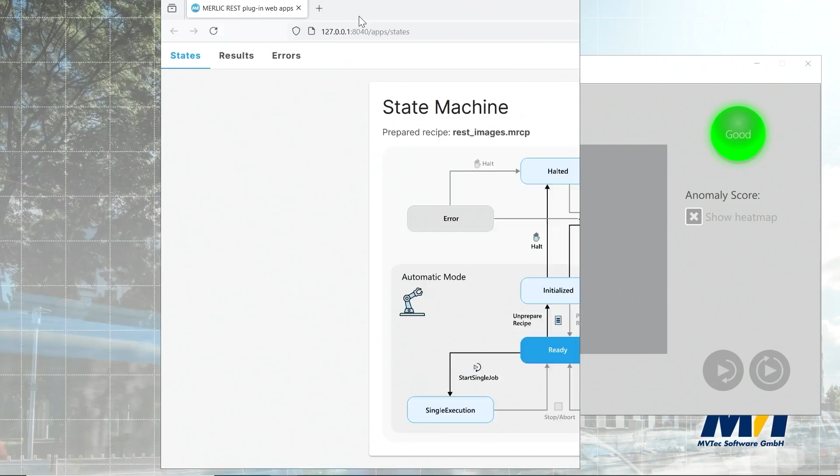So we see now the MERLIC frontend is started. Let's open a browser and give the address to the REST server. And now we see the state machine of our system.

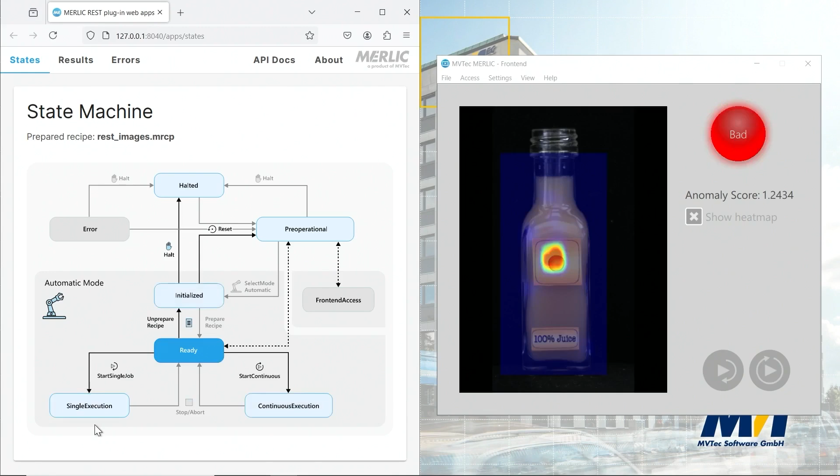Until now, there was nothing new in the presentation. Let's do a few single executions to see our application is working and go to the API docs. Now the API documentations are also not new in this MERLIC version. You can actually consult them in previous MERLIC versions as well.

But what is new is when we go to the results category, we see we can now get image results for PNG images or for JPEG images. These methods can be used in your application when you are building your own REST client to display images from your MERLIC application. Let's try getting an image result for PNG.

The very nice feature about the API documentation is that you can actually try each method out by clicking on Try it out under the method.

Now let's say that we want to get the result ID 1, so the first image result that we get from the first execution, and data index is 0. We only have one image defined as result in this recipe, so this has the index 0.

Let's click on execute, and we see, as a result, we get the image corresponding to the first execution of our application. Now, this is only one example of how you can use the REST methods in order to get images from your MERLIC application in your REST client.

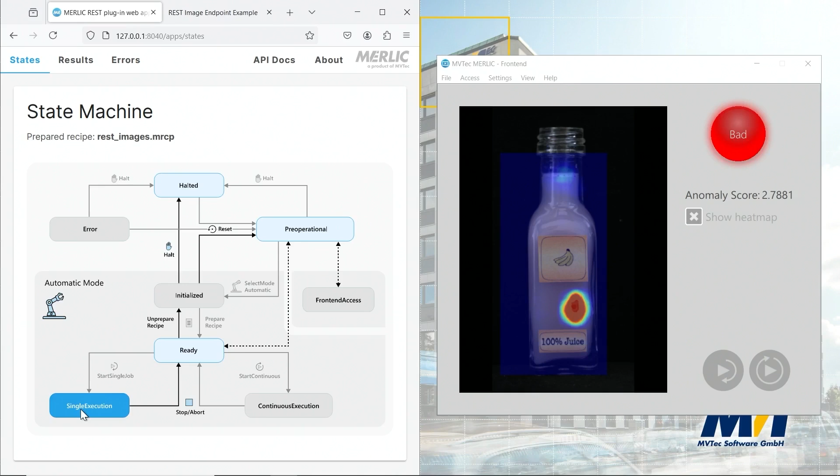Now let's do a few single executions to see how our application works, and switch back to the REST image endpoint example, and here you can see that the image results are automatically updated. And this is one example of how you can serve images using the REST plugin in MERLIC 5.6.

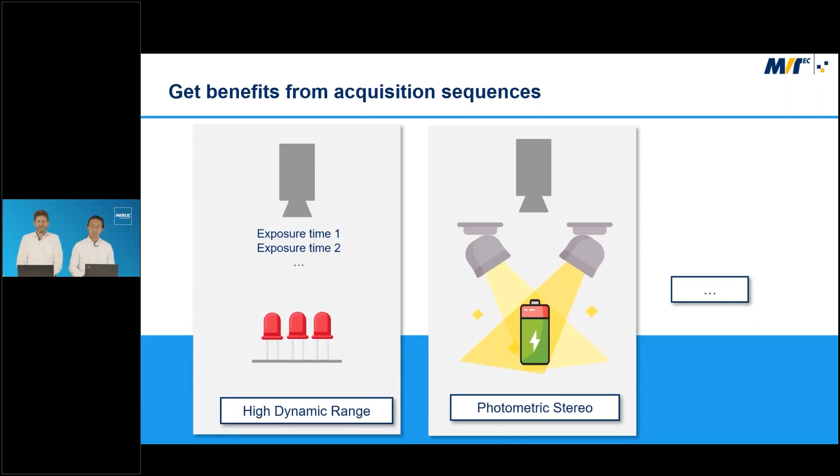Hello everyone, I'm Xin. I'm very happy to show you a new feature of MERLIC 5.6, image source parameterization. In this video we will show several parts. First, how to connect the camera with MERLIC and capture a live image, and maybe achieve a simple application. Second, how to set the image source parameters for your application.

Assume you have two applications with this setup. For the first application, you set a suitable exposure time to capture a good image. But for your second application with the same setup, the previous exposure time is too high, meaning your object might be overexposed. In this case you need a second, lower exposure time. So the question is how to set up everything simply. We will answer this in the second part.

In the third part, we prepared two applications with two image source parameters, and we will show you how to integrate everything in the MERLIC runtime mode. Now let's share my screen and see what happens. Here I have already started MERLIC, and let's connect the camera and MERLIC.

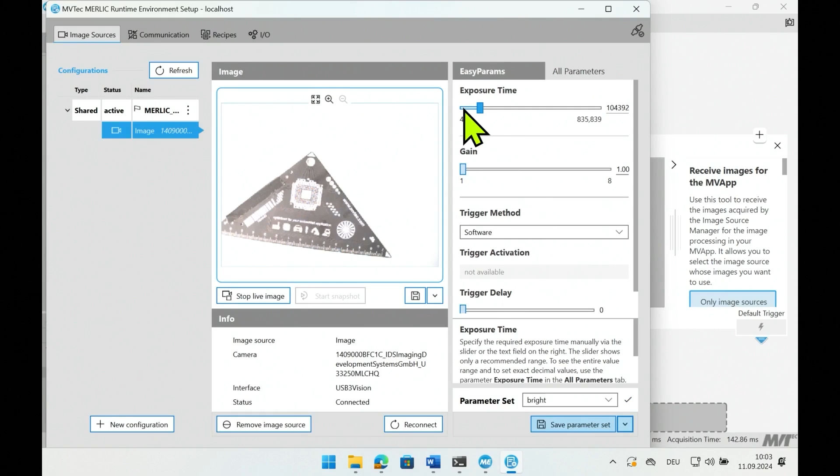And save as bright. And if we set it bright, this file will be saved separately. And we put an exposure time lower. We click here, save as dark. And this parameter set will also be saved separately. So we have now 3 parameter sets: bright, dark, read barcode image source parameters.

And now let's go to the selected sequences again, and we can see the active sequence is dark. So if we start it once, you see the exposure time is very low. And if we select bright, run it once, the exposure time is high, and we get an overexposed image.

In this part, we will show you 2 applications. The first one is to read the barcode from this triangle, and the second one is to read text and numbers of this sheet metal. Due to the reflection of this material, it requires low exposure time to capture a suitable image. And to show you the 2 applications, we prepared something for you. We create an MV app, read barcode, and MV app, read text and numbers. And for each MV app, we create the corresponding recipe files.

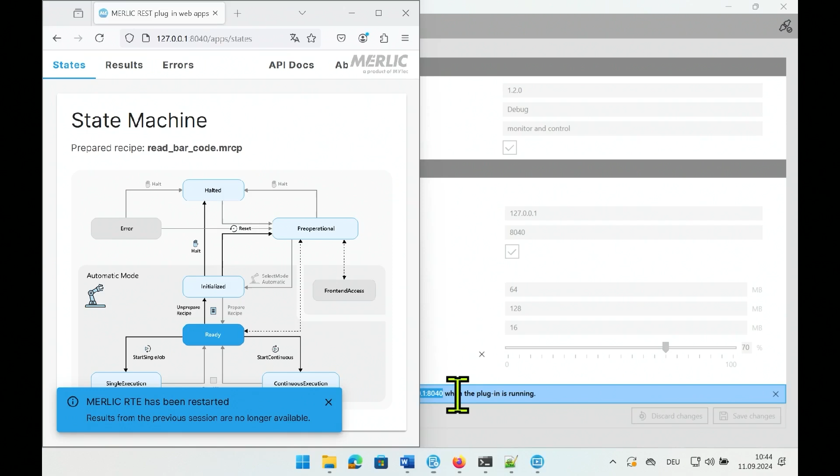To use this plugin, you only need to copy the IP address and port number into a web browser. So now you can see the state machine. And let's put the front end here. If we click ready, we can see the 2 recipes that we prepared. And the first recipe, read barcode. Start single execution. So now you can see the barcode is read. Here is the decoded information.

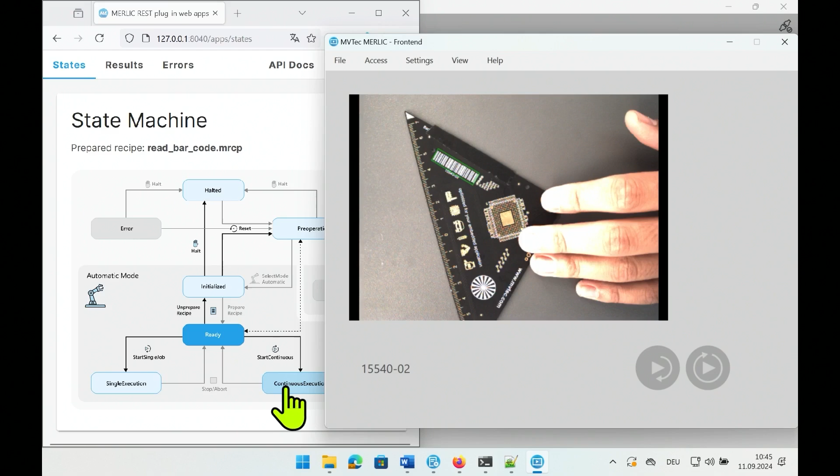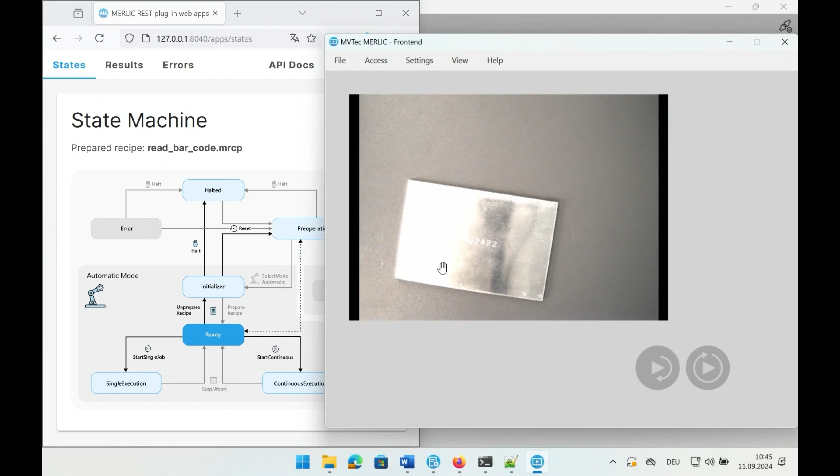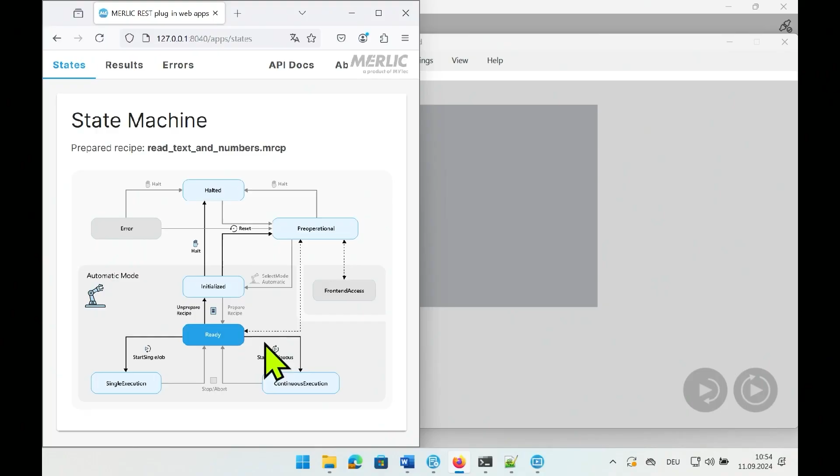And if I click continuous execution, you can see here is a live image. And if we put this sheet metal here, it's overexposed with the current exposure time. Therefore, we prepared another recipe with another exposure time. Now, the second application is loaded, and let's adjust the window size and start single execution. So now we can see the sheet metal and the text and numbers are read, and here are the results.

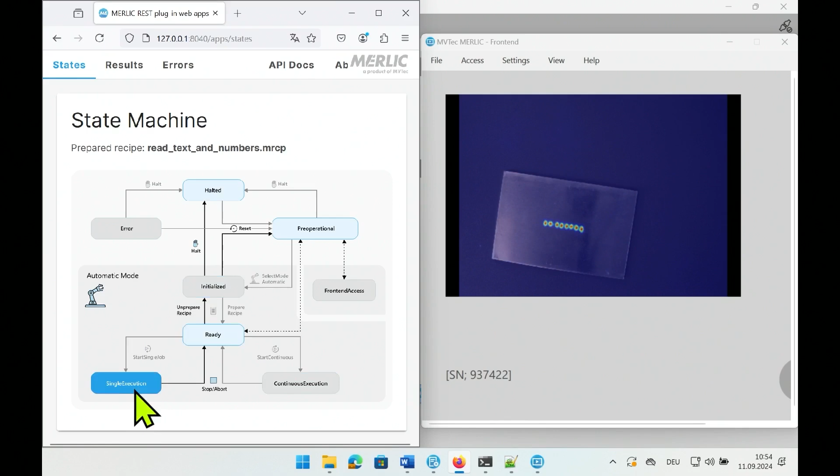So this is the second application, and in this video, we showed you a new feature of MERLIC 5.6, image source parameters, and now we can set the image source parameters into the recipe, and we can set it very simply in a GUI. Thank you very much.

Okay, thank you, Yin. Very nice video. Thank you very much, Ulf. So let's continue another feature. Let's share my screen again.

Okay, so Yin, do you remember the release webinar of MERLIC 5.4 when we showed the new acquisition sequences feature? We got a question from one of our customers: do you have a photometric stereo tool in MERLIC? And we carefully listened to this feedback, and now we can provide it as a concept tool as the first step. Yes, I remember, and I have to say photometric stereo is a very interesting and useful technology.

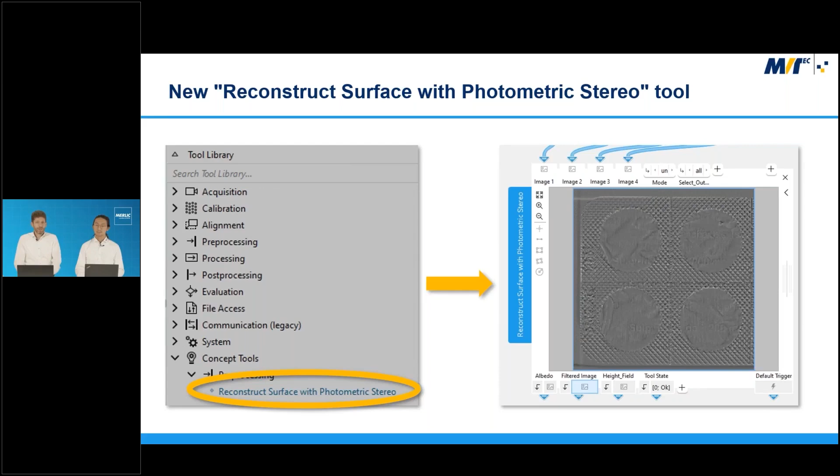Sure. One of the key advantages of photometric stereo is to reconstruct the relative height information and surface information. Photometric stereo can operate in both calibrated and uncalibrated modes, offering flexibility depending on the available data and also the customer requirements. Acquisition sequences make it possible to apply photometric stereo simply on the production line.

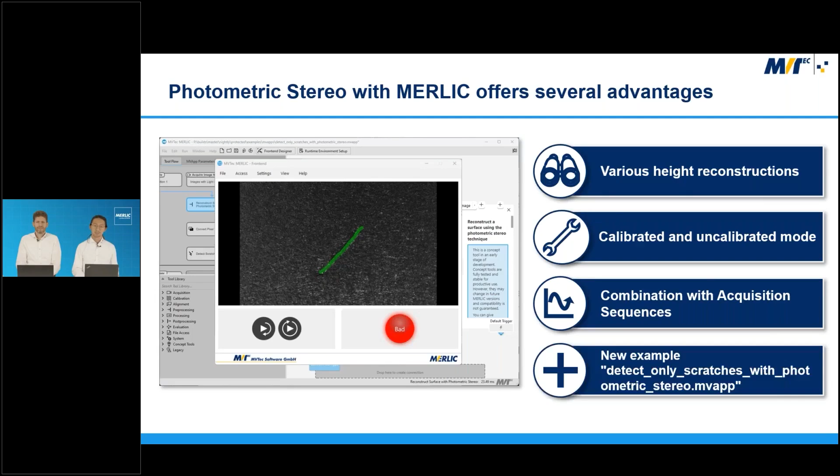Last but not least, we provide an example to demonstrate how photometric stereo can be applied to achieve precise and detailed relative height reconstructions. To test this feature, our colleagues have developed a nice setup, which we will show you in our next video.

Hello and welcome. My name is Benedikt, and I'm going to show you how you can use the new feature Photometric Stereo in MERLIC. Photometric stereo is a technique in computer vision that helps us to obtain detailed information about the surface of objects. This is done by taking multiple images under different lighting conditions.

In this method, we use several light sources, each coming from a different angle. By analyzing how the surface reflects the light, we can derive the surface normals. This allows us to reconstruct the object shape and texture. Photometric stereo is particularly effective for capturing very fine surface details. Therefore, it can be used to detect scratches, dents, or deformations, for example, in PCB or battery inspection.

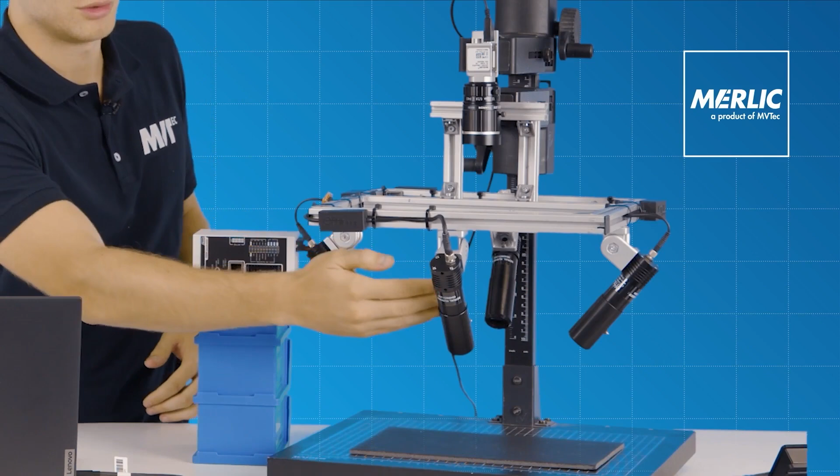Let's talk about the necessary hardware setup. We need at least 3 light sources. In our case, we are using 4: 1, 2, 3, and 4. We also need a camera. And all of this has to be arranged in a way so that the light sources illuminate the field of view. We are additionally using a LIMEC controller to trigger the lights as we take images of the target object. With these images, we can then perform photometric stereo in MERLIC.

We prepared here an example MV app. And at the core of this app is the new tool Reconstruct Surface with Photometric Stereo. As you can see on the right side, as always, you can find information about how to use the tool in the Quick Tool info. The tool requires at least 3 images of the object to be inspected as input. The images must be taken with at least 3 different light sources. In this example, as you just saw, we are using 4 images corresponding to our 4 light sources: 1, 2, 3, and 4.

In addition, the spatial relations between the light sources and the camera must be known and specified. This is done with the tool input parameters slant and tilt. Slant is the angle between the optical axis of the camera and the direction of illumination. Tilt is the angle within the object plane or any plane that is parallel to it. We estimated the parameters of our setup in advance: tilt values and the slant values.

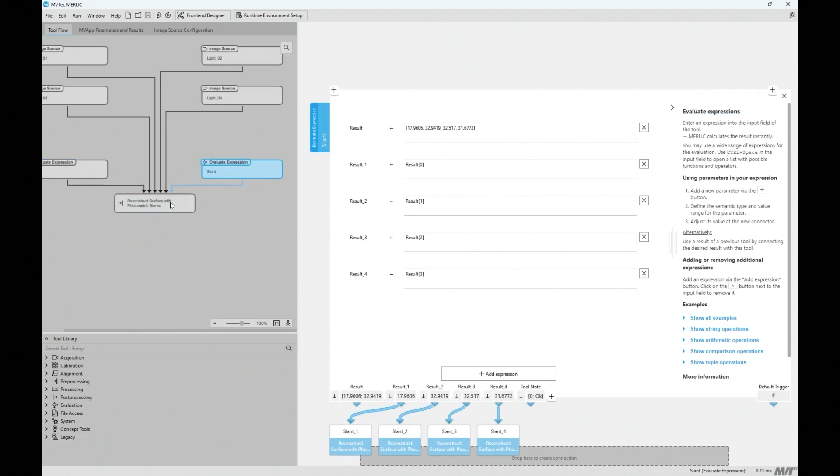It is also possible to use the tool in uncalibrated mode. This does not require specification of the tilt and slant values, but we recommend to use the calibrated mode for optimal results. We also have to set up image acquisition. We can do this using the Image Source Manager. In this example, we use an acquisition sequence to capture 4 images, with 1 light source being active in each image. Once we have specified the tilt and slant values and configured the image acquisition, we can run the MV app.

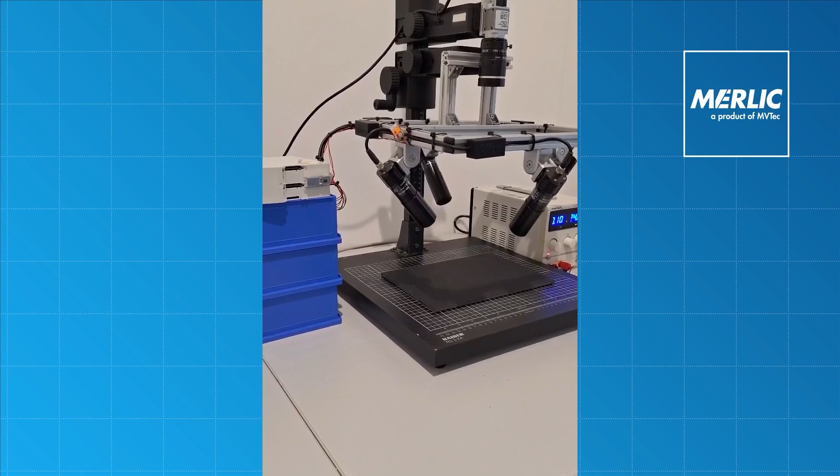We recorded images beforehand because the lighting conditions in here are not optimal for photometric stereo. As you can see, 4 images are taken, each with a different light source being active. Once the images are acquired, they are forwarded to the photometric stereo tool. Together with the tilt and slant values, the tool computes the output images. As output, we receive the albedo image, the filtered image, and the height field.

The albedo image returns the albedo factor of the surface. The albedo is a characteristic of the surface and describes the ratio of reflected radiation to incident radiation. The filtered image is a vector field calculated from the gradient image. And the height field is an image in which pixel value corresponds to a relative height. As you can see, the scratch is clearly visible in the output images. You can now use these images for further image processing steps.

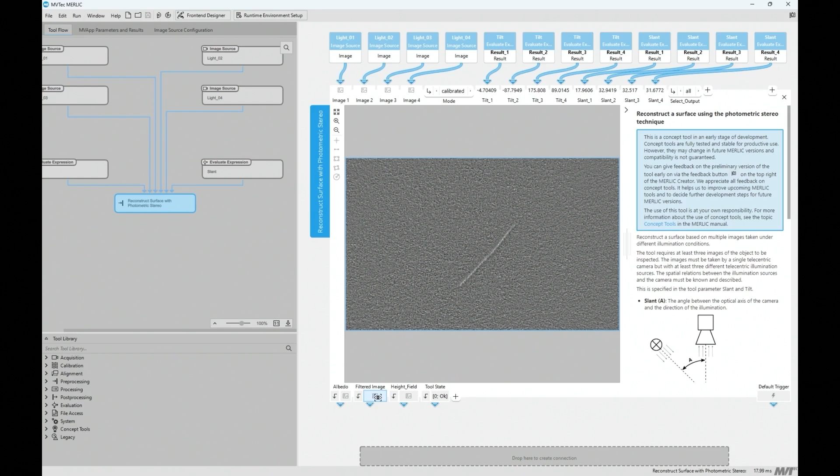That's it. The new feature Photometric Stereo in MERLIC. And remember, this is a concept tool. Feedback is always welcome. We are looking forward to your opinions on the tool.

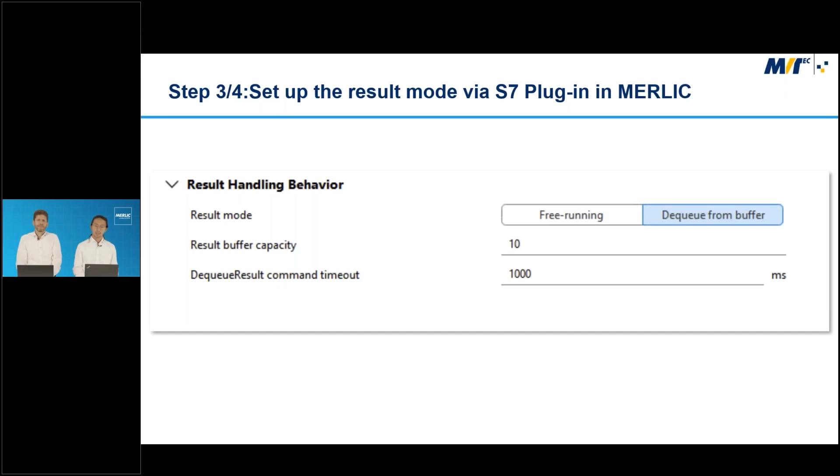The second one is dequeue mode. Dequeue mode is used for managing continuous data streams. The dequeue mode is more for applications that, first, prefer to have the processing result independent from the result queue. Second, you want to trigger multiple jobs and retrieve the results all at once. Besides, another advantage with dequeue mode is that the clocking is controlled by the PLC. After configuration, you can achieve your application's start vision job and get result, switch recipes.

Okay, thank you, Hien. Those were the 4 new main features of MERLIC 5.6, but there's more to come.

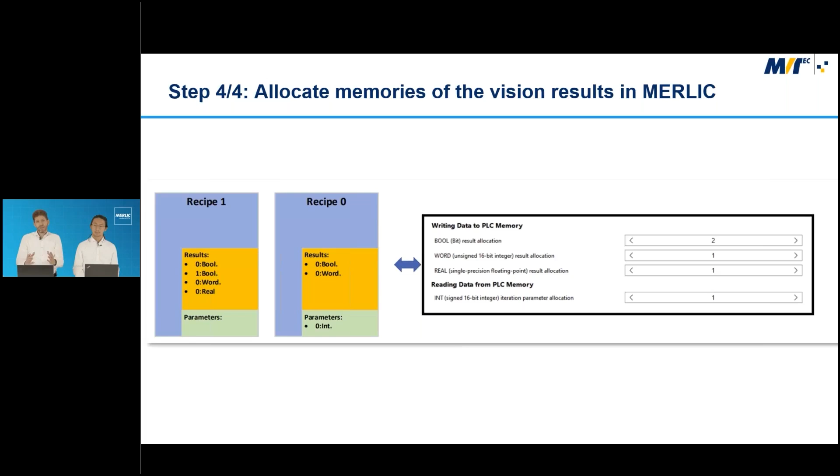So let us now explore the other innovations of MERLIC 5.6. Concept tools give us the opportunity to integrate new functions and test them together with our customers to see whether they work in practice. Thanks to your help, we have now been able to finalize 3 helpful tools and are now making them officially available. You can now find the following 3 tools in the tool library under the section Processing: Count with Deep Learning, Recognize Color, and Segment Image Pixel Precisely. They have been revised, extended, and improved according to user feedback we received. And you can now use the tools with full documentation and integrate them into your productive workflows.

Deep learning and artificial intelligence are now part of our daily lives. And of course, these technologies are extremely important for making machine vision even better, faster, and more efficient. And this is why we are constantly working on further developing and improving the functions included in our software. Can you give us more information, Hien?

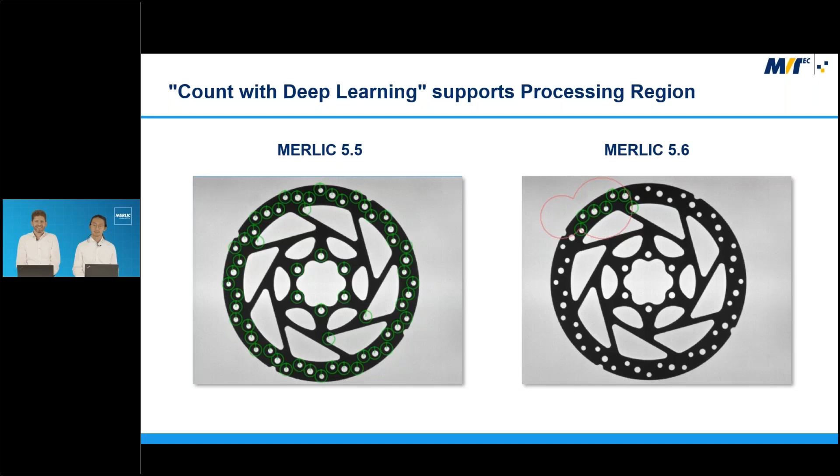Of course. So the first one I want to introduce is, with MERLIC 5.6, you are able to define processing regions and focus your processing in the Count with Deep Learning tool. It can reduce the processing time tremendously. And next, you can also exclude unwanted objects. In this brake disk, there are circles with different radii. You can tell the model in training you just want to count the smaller ones.

We also implemented instance segmentation into the MERLIC tool. You can access this parameter in the tool Find Objects. If you activate instance segmentation, you can not only find objects, but also differentiate fore- and background of the bounding boxes. This is very useful in applications where objects are close to each other, or touch, or overlap. As usual, we provide an example for that, so that you can get familiar with this tool and the new parameter.